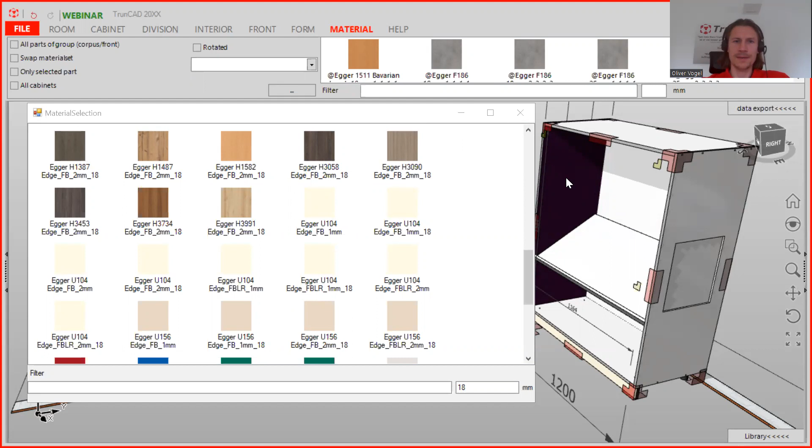So I will close this, and we start a new project. Just click on File and let's start. So the first one was also a desire from many customers, because when you have material sets here, it's not so convenient to scroll to see all the information and also the texture of it.

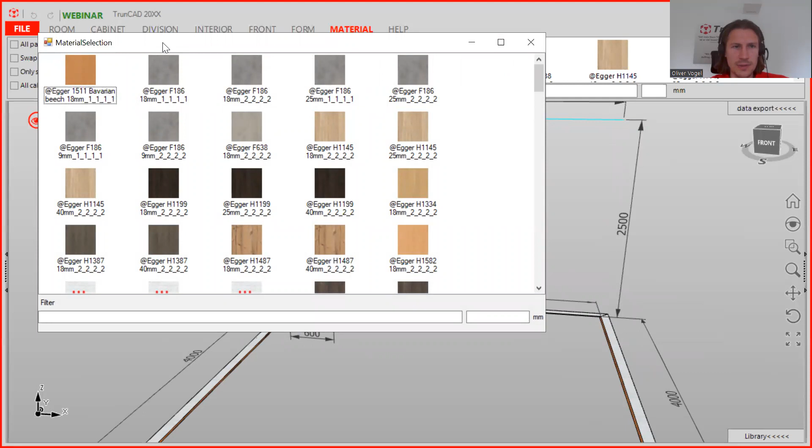That's why when you double click on the material, the separate window opens. You see it here. You can also create your own size, and drag it and drop it wherever you want. You can also use the filter function here. You can type in 18 millimeter, and you get the 18 millimeter material sets.

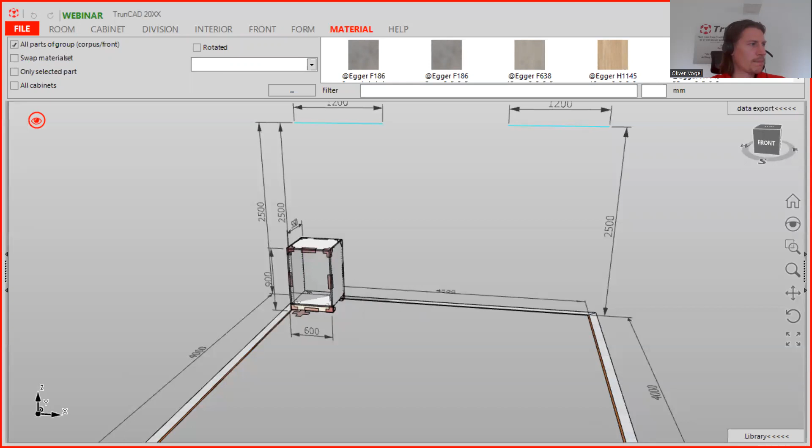And now it's working as usual. You just drag it. You can make a tick on a bar. So, and now you can drag and drop this over it, and it's working. All right. It's automatically glowing in the background. I don't have the task list here, that's why I need to go to the second screen, and you can close this.

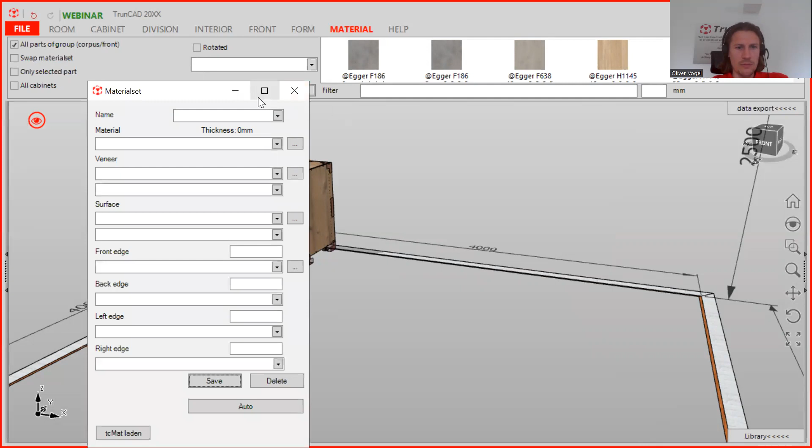And another new function: especially in the English market, we have some customers who are also producing for other carpenters or cabinet makers, like building blocks in London. And they have different material sets than the other carpenter. When you click on this three dot button, you can open the material set, and here is a new button where you can load the tcMAT file.

When you click here, you can choose in Windows C, in the software folder, TrunCAD 20XX. You have the different files here, and here you can choose the tcMAT file. You usually find it in a backup. I'll show you also how to create this. That is easy. You see it here, and there are different files.

Usually when you click on Help and on Hotline zip, you see the backup folder opens automatically. I just close it and open it again. So when you click Help and Hotline zip, the hotline zip file automatically gets created. You also see the current time, that's German time. And when you double click here, you get the material file.

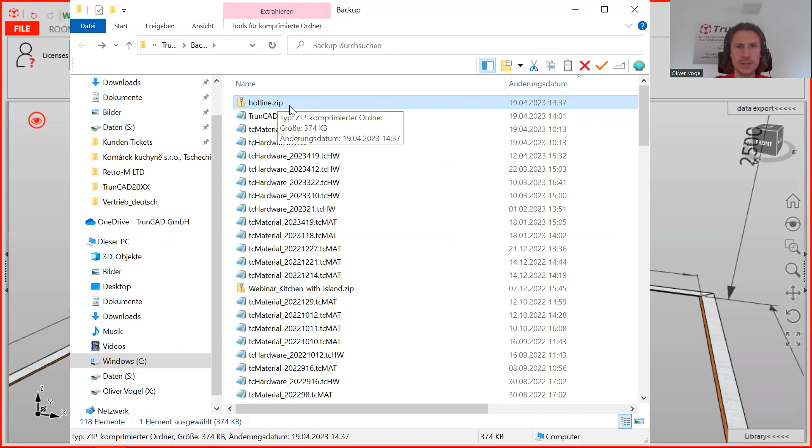And you can extract this and give it to your colleague when you have a separate material file. It makes it much more user-friendly when you have co-workers or when you cooperate with other companies. So with the right mouse click, you can extract the file and send it over. That is a great function as well.

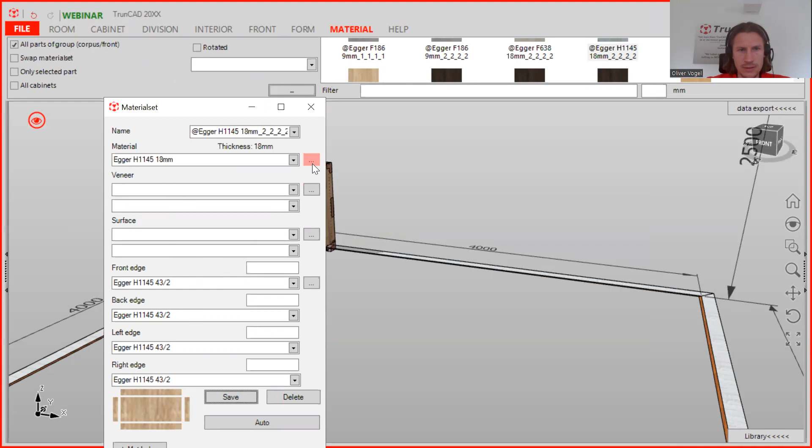And another great function is because of inflation and the fast changes of prices. Usually when you go to the material set, you click a material set, click on the three dot button, and you see the material set consists of the panel as well as the edge bandings. When you click the three dot button again, it opens, and usually it was only possible to change the price per square meter here. But now we have improved it, because a lot of you wanted this new function.

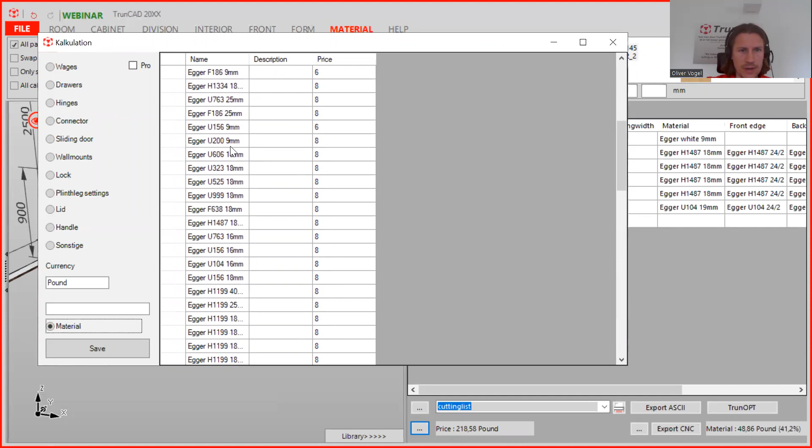When you now go to data export and click on the three dot button on the left-hand side of the price calculation, the calculation opens, and at the bottom you have the material, with all materials available in TrunCAD in your version right now. You can make this bigger, and here you see the prices. So you can adapt these prices much faster. So that is the first part of it.

The second part of it is, I will close it, because you also have the price calculation here. Please consider that in the basic version the price calculation is not included.

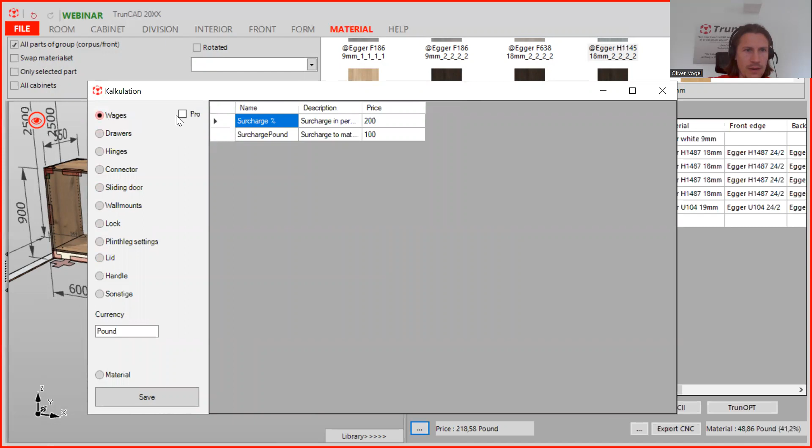And when you have it with a package M or with a TrunPoint version, you also have the price calculation included. And when you click now here on the three dot button, you see here on Wages, you can make a tick on a checkbox. You see here, as usual, the prices for any hole or for the setup for the edge or setting up here the angular cut.

And here when you turn on, you can change here the price. Or you can change here the price in percent. You see here it's now 200. I just type in 100%. From 200 and 100%, save this, and you see here it's already changed.

That is here also linked to the, it's similar like the margin in percent. Here you have also the surcharge in percent. You can change it here, or you can click also on here and add like 200 and save this, and then you have 100 more applying to the whole price.

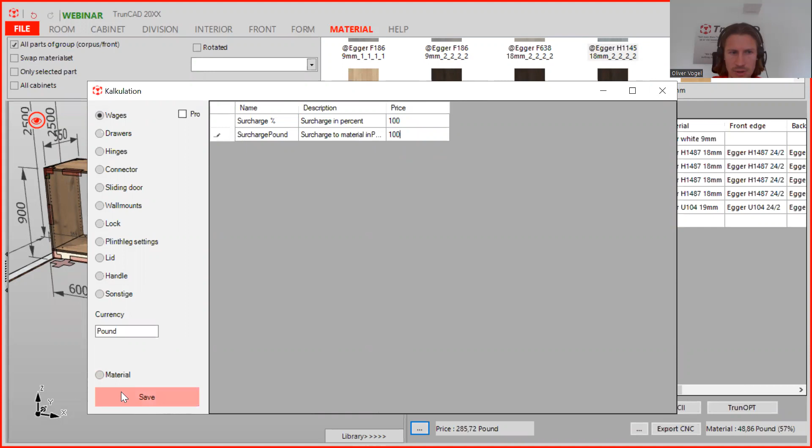You see here it's 285.72 pounds, and when you type in here 100, then it will be 100 less. So you can make it with a whole number or with percent. That is also a great function to make the price adaptation more convenient.

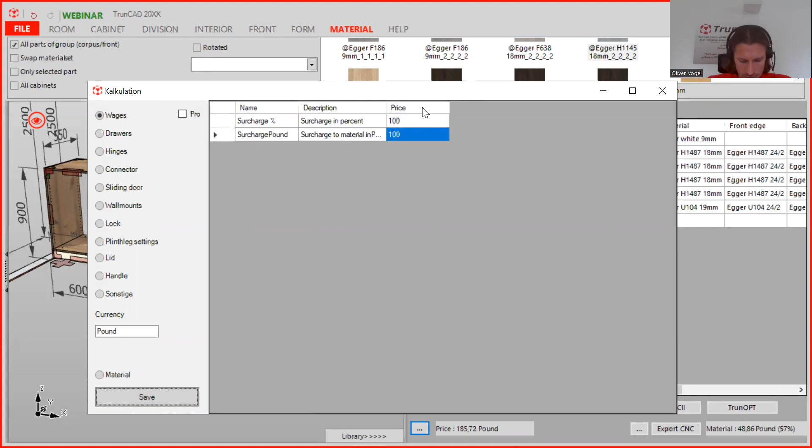All right, so the next one is also to add notes or remarks to your cutting list, because here you see you can create your own cutting lists. So when you click here on the 3-dot button, the window of the bill of material setting is opening. And here, when you click on the drop-down menu, you see the lists, and you can also create

your own lists. And when you scroll down, you see here's a new point, remark. I already have it here, but you can also remove it. Now here you see everything included in your cutting list. And you can also add something more, like point 106 remark. You just click it, that is blue marked, and you click here, and it's applying here on the bottom, and you can

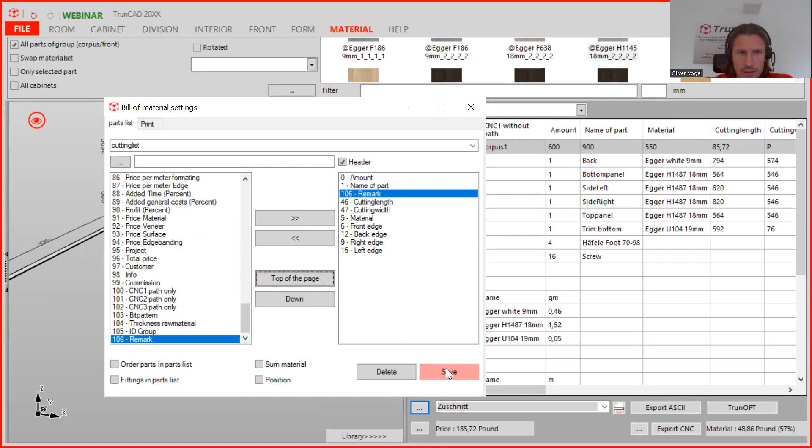move it up. So when you save this and close this, and here we close this window as well, and we go to data export. Then you can apply here the cutting list, and you see here its remark. And now when you have on the right side a specific thing, you just click on here. You see the right side is also marked.

It's a pro function, and you can type in here like note XYZ. And then you can also click here export ASCII and save it as a CSV file and open it in Excel or another similar program. Then you can add notes to your cutting list. So that was also a desire of many of us, and we are always looking for cooperation and improving the software for you.

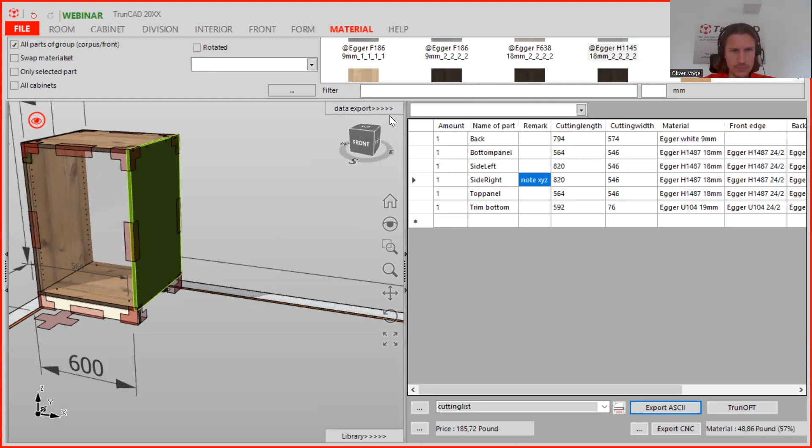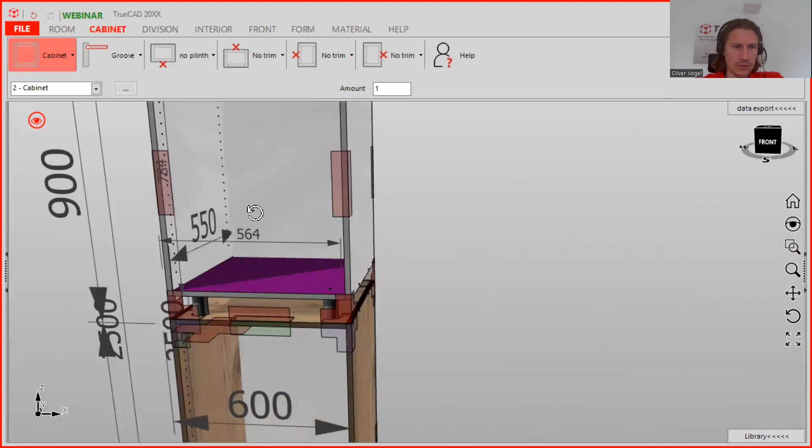So the next one, therefore we close data export. It's about the vertical trims. Let's say, like here we just imagine it's 500 height, and you want to have on top also another cabinet. You can just drag it and drop it here on this. And here you see it's going on top. Now you can click here to no plinths and remove the mark of the checkbox.

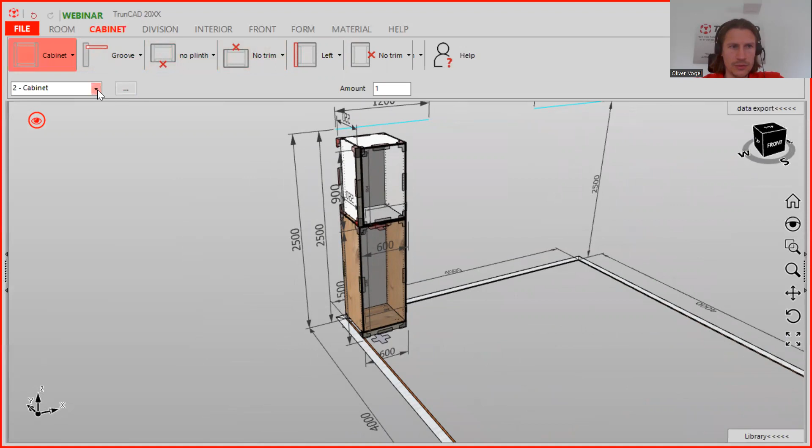Then it's removing. So when you want to have here a trim on the left side, which should go through the whole, and you just want to have one piece, then it's now easier. Now you just click here, you see no trim on the left side. Here you make a tick on it, trim, and here you choose the first cabinet, and here you click also trim. And when this is the same material, it's automatically getting connected. Before it was not so convenient.

Before, I show you here, when you have it like this, trim right side, you are still able to extend it, like here to the bottom. We will extend it 1,500.

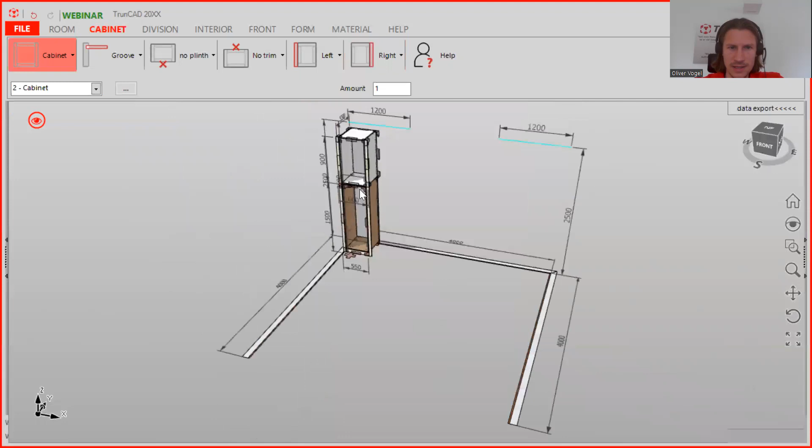Then you see it's here also extended, but now the cabinet is automatically adapting. Before, you needed to also change the width of the other cabinet, and then you had the same product. But now it's even more convenient, because when you go back here to the first one and want to make a quick change, it's now much more convenient.

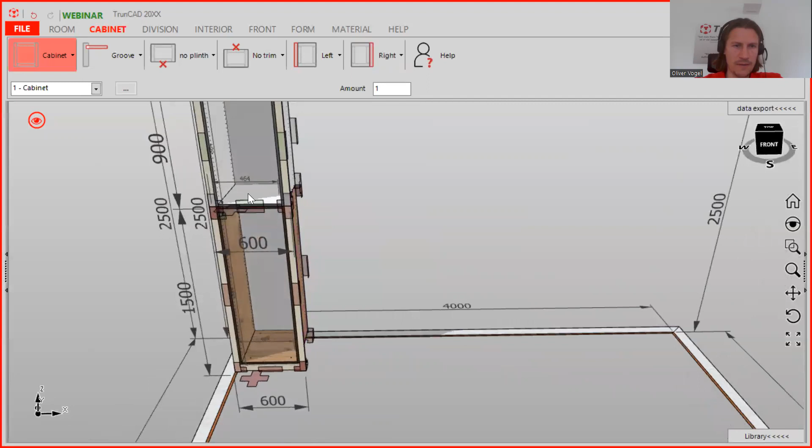So you just click here, right side, type in 0, and here we will move it back to the width of 600. Click here, and they will automatically get connected. In case you want to have them separate, that's also possible. Therefore, you just go here again.

You see you can make an overlap to top, like minus 0.01. That was one zero too much. So, over the top on the right. Then it's 0.1 millimeter, which is still in the tolerance, and the program does disconnect them.

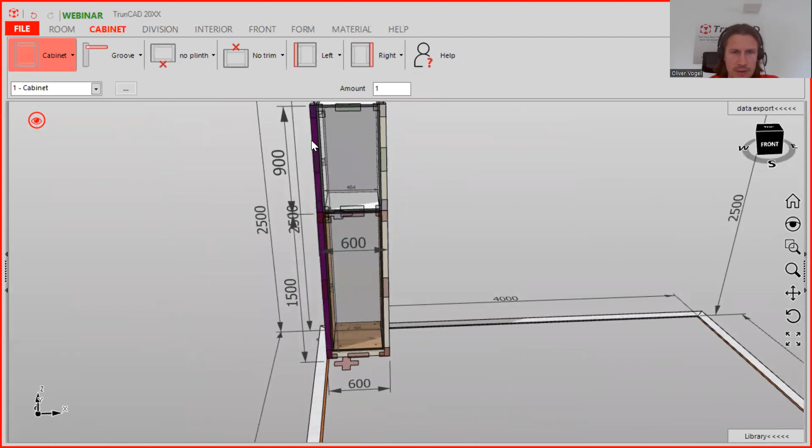You see here, when I go with the mouse over the left one, it's whole marked, purple colored, and here just the upper and the bottom vertical trim. All right, I think that is also well understandable. If not, just let me know in the chat.

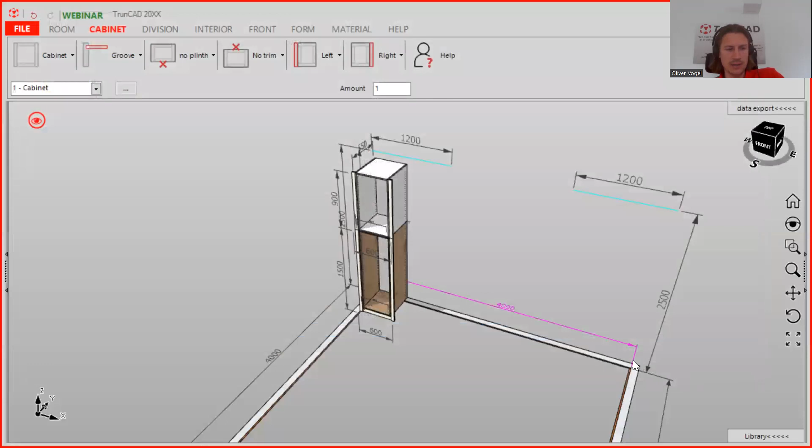The next function is also really nice because it's about new shortcuts. You can press Control S for saving. When you click Control S, you can save your project. Before, you needed to go to File and click on Save Project. Now you can use the shortcut Control S and it's opening.

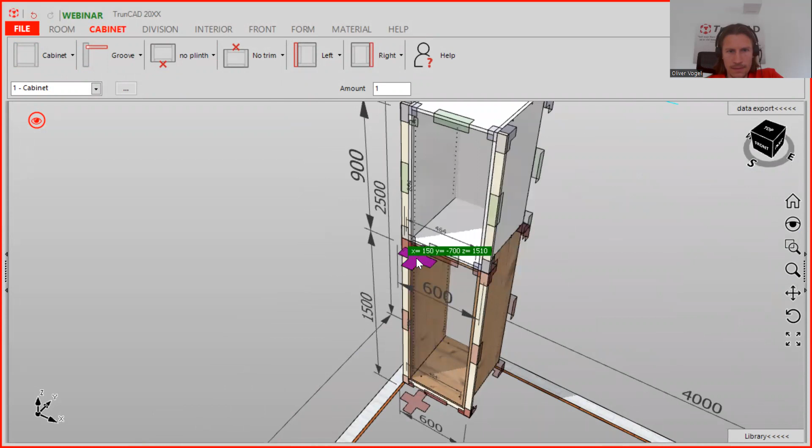And also here you have the buttons Undo and Redo. Here I will just delete the upper one. When you click Control Z, it's undo, and when you click Control R, it's redo. It's the same as here, where you can also undo and redo, and now you can do it with Control Z and Control R. That is also much more convenient than before.

Please note, when you have the trial version, the undo and redo function works 10 times. So it goes back 10 times, it jumps 10 times forward or back. You need to consider it. This is because of performance issues. All right.

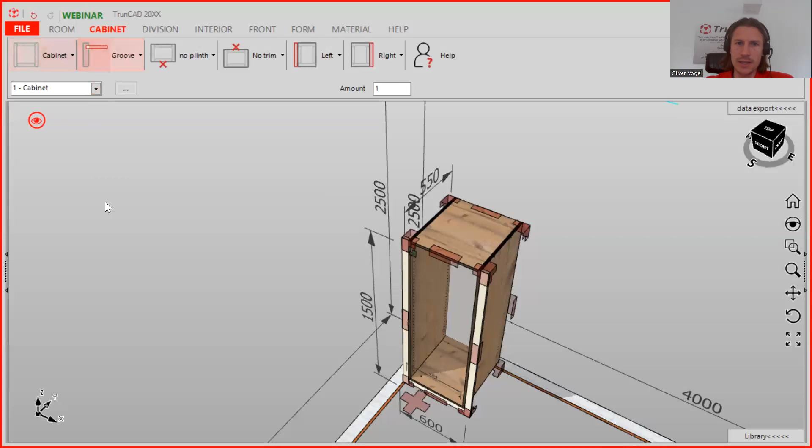The next one is also a really good improvement, especially for the small carpenters who don't have a connection to a CNC machine. That is about when you have a ceiling apex with a sloping roof. We type in here 2000, the height of the cabinet, and the width is 1000. In this case, I will remove this.

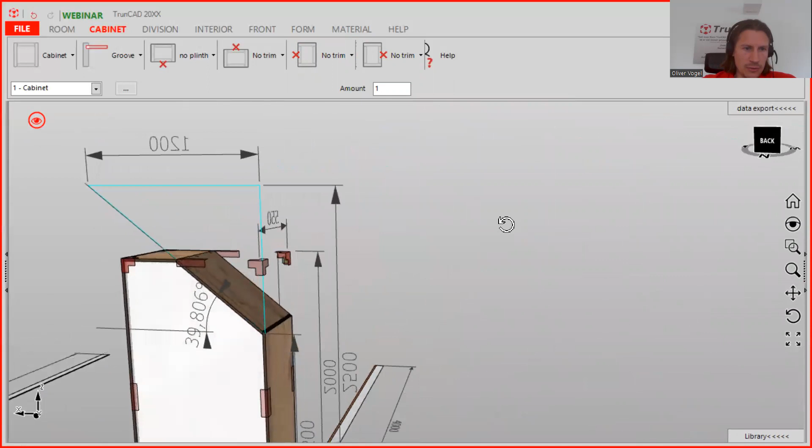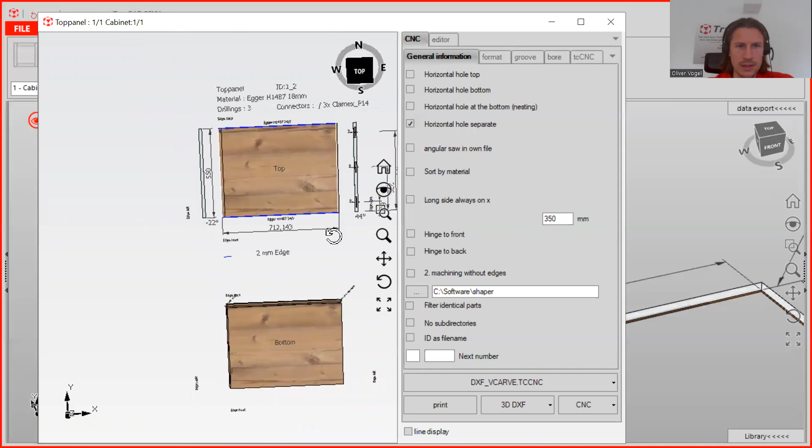You see now you can also set up the angle. I just type in 44 degrees, and here it is adapting. The new function is that when you double click this part, you have more information available. You see here the angle, which wasn't there before. It's 44 degrees, and here it's minus 22 degrees. So that is applying. I will close this.

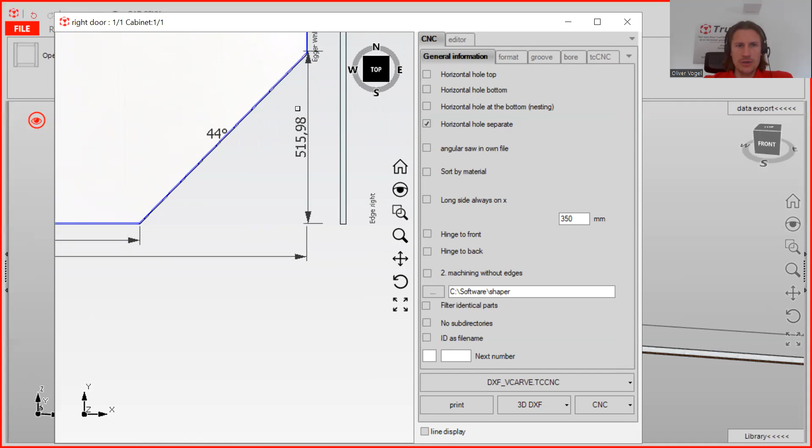When you have a door, we just drag and drop a right door on it. You didn't have these measurements before, but now when you double click the door, you see the 44-degree angle, the measurements of the lower part, and for the sloping roof, the distance on the top. That is more convenient for carpenters who don't have a CNC machine, and you get the information in a more convenient way.

All right, I am closing this window now, and we have a look at the next improvement. It has to do with the handle. When you click here, you can choose no handle, then it disappears. And here you can also have a pocket as a handle.

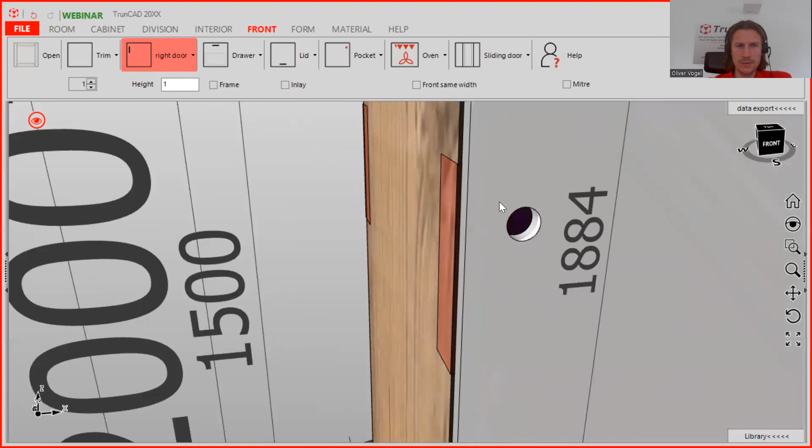Here you see the drilling is going through, and the improvement now is that you can choose the depth. One means it's going through; when you type in 10, you see you have a distance of 10. So the pocket has a depth of 10. That is a new improvement. It wasn't there before.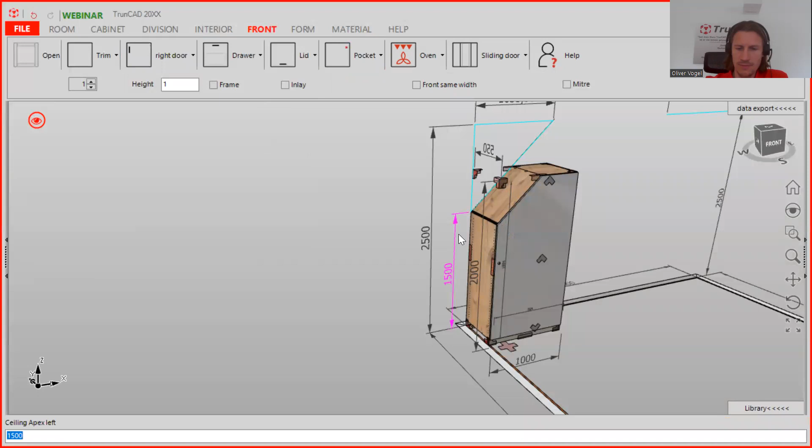So the next one is also really convenient. Therefore I will remove the ceiling apex. Yeah, and we remove the door, and we add here a double door. So now we can also change here to the wireframe. Yeah, and you see now here the hinges.

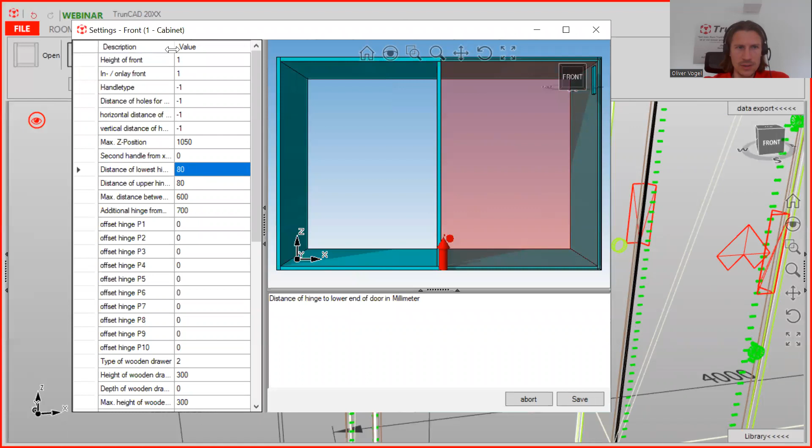So when you click here on the smart click for the front and you go here in the setting, you were able to change the distance of the lowest and the upper hinge here, and also the maximum distance in between. So the distance between these doesn't get bigger than 600. And also when you have shelves, you can set up here any hinge. When you type in a positive value, it's going up, and a negative, it's going down. You had to do it manually before.

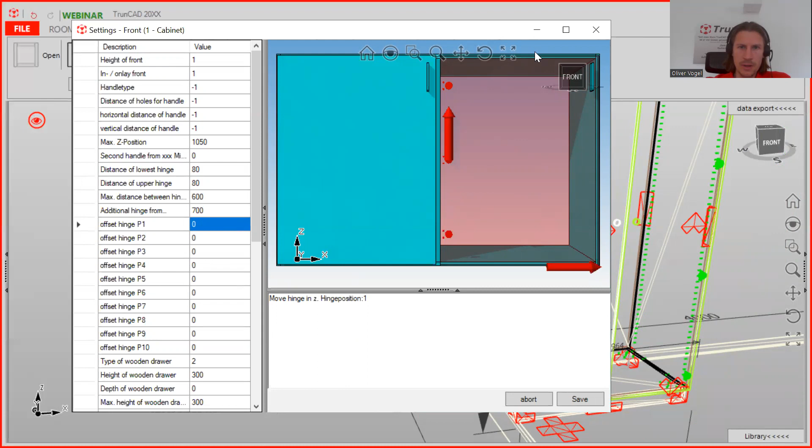But now I show you. Therefore we go to another view, and we draw the fronts open. And now we just add here 2 horizontals. So, we close the doors and we go to the last view. Now you see you need to make an offset individually. You can choose, shall it be upper or lower? That is still possible.

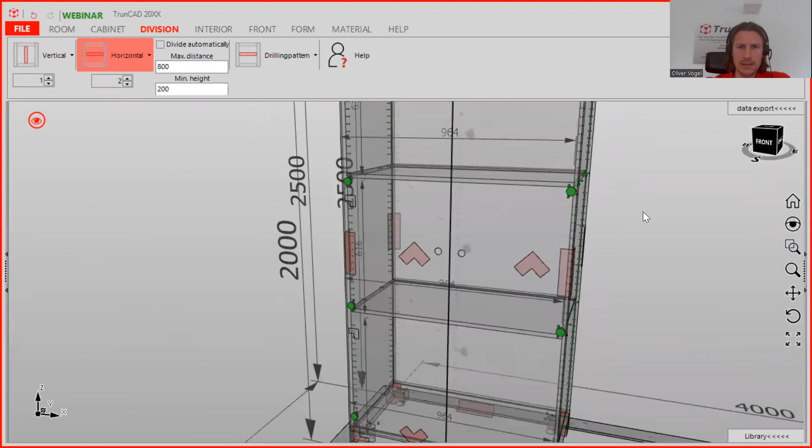But now when you click here on the front tab and here on a drop down menu for the doors, you can have here an automatic value for the offset of the hinge. And here also a positive value is going up and a negative value is going down. And when you type in like here 40, then you see everywhere it's going up 40 millimeters. When you type in here minus, you see it's changing straight away to minus 40. That is also a really convenient function.

All right, so that was the 10th new function. Now we go to the 11th one, and this has something to do with the plinth panel. So therefore, we change here the view. We draw the fronts closed, and here we go to this one. So when you go here to the cabinet tab, you see here is no plinth. And you can here remove also the plinth legs, then it's removing.

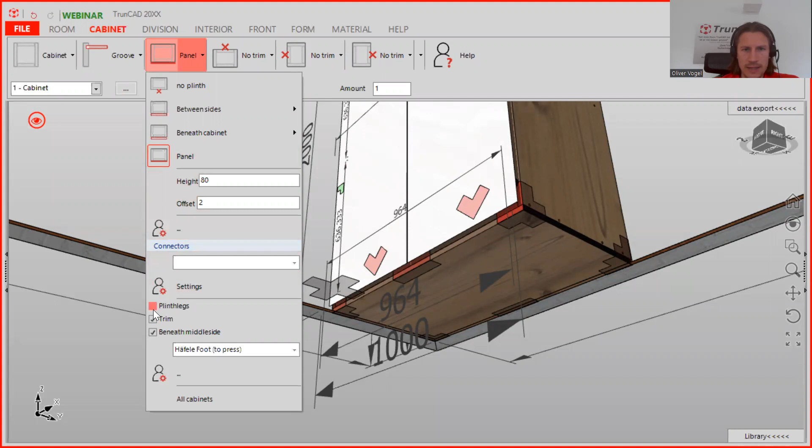So before you couldn't have here the bottom panel for the plinth together with the plinth legs, but now it's available. What is also available is, when you have here activated the trim, you can here activate or deactivate the trim for the back, left, and right. That is a new function.

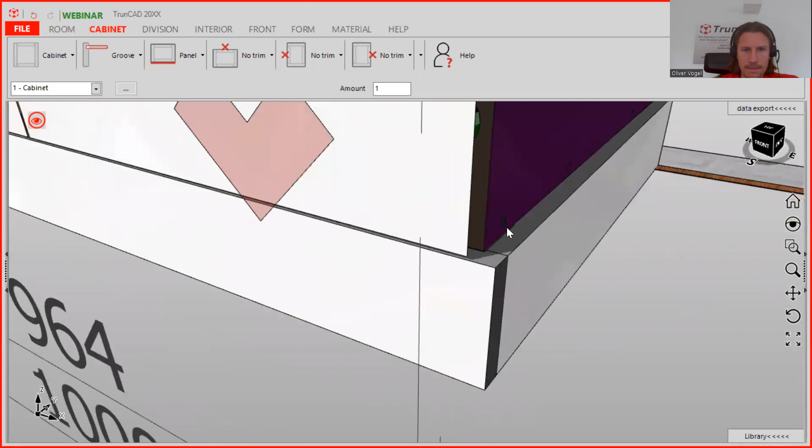And you can also set up, I've made it in preparation. In the default, it wasn't like this. When we have here left and right. Ah, yeah, now it's here. You see here the overlap. And when you click here in the setting for the plinth, you can here type in distance left 18 mil. This is the thickness of the material for left and right. And when you have here distance left, from the edge to the middle, and save it, then you have it here.

And you can choose. Before it wasn't possible to have here the plinth panel. Now you can have it also with everything else. So that was the 11th function. And now there's also a really specific function. I think it's not so important in general, but I still want to show you this.

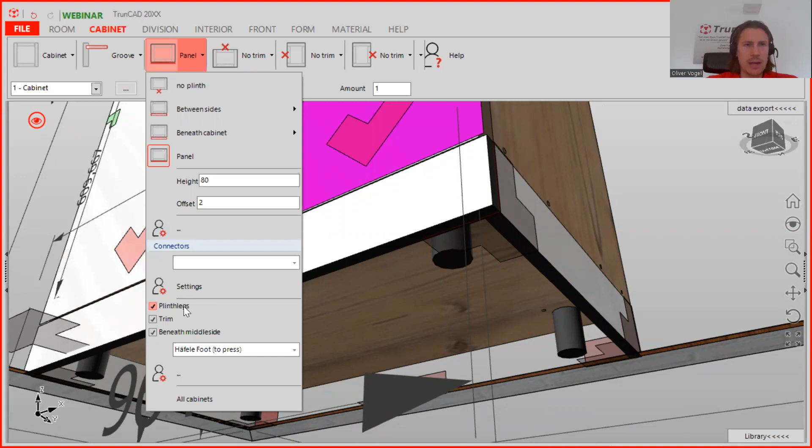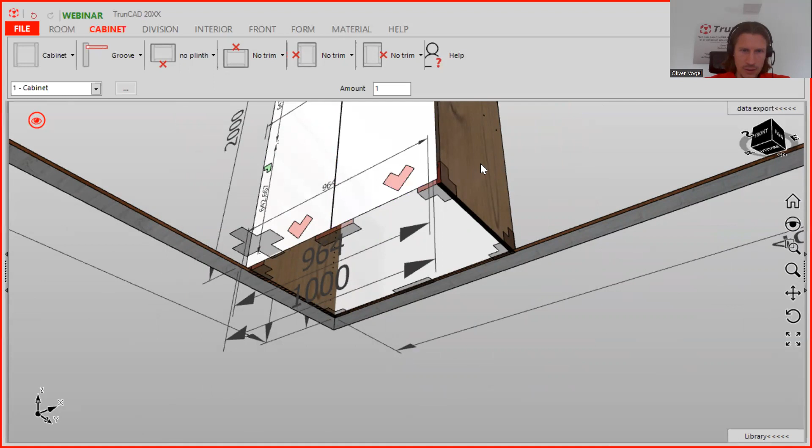In a case we don't have here a plinth, and we don't have the plinth legs, and we don't have the bottom panel. That's why I delete here the bottom panel, and now you can still have like a plinth with the double door with trims on the bottom end. So, therefore you click here on the smart click, and you type in here overlap at bottom minus 80 and confirm this with enter.

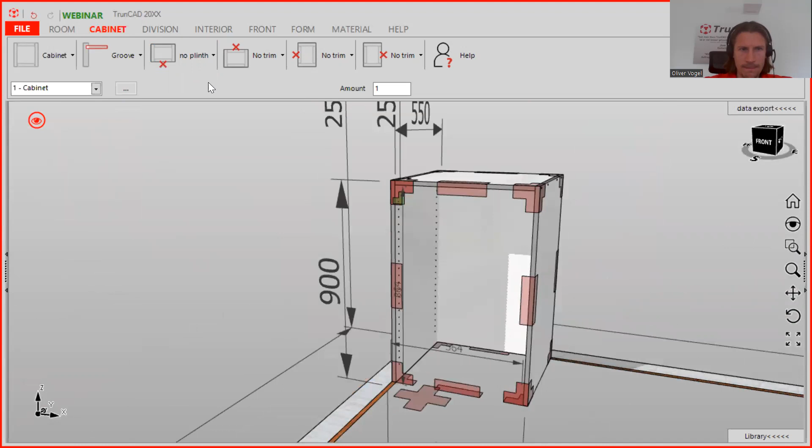And you click on here, maybe I start here a new project, and we remove this. And we remove the trim and plinth legs. And now we have here a double door.

Now I know, because I was drawing the doors visible. That's why I didn't show this.

When you click here and type in overlap at bottom minus 80, then here's automatically coming a trim at the bottom end. So you see, you can also extend this trim.

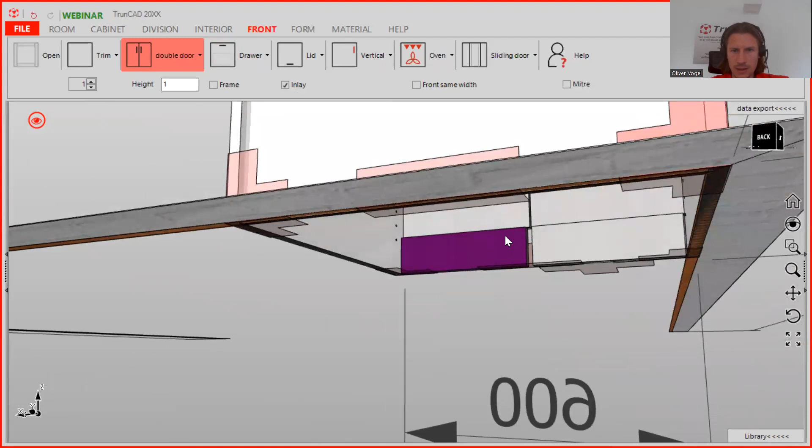Therefore, you go to the cabinet tab and click on the drop-down menu for the plinths. When you type in the height like 140, you can make it bigger. And you can also set drillings for this connection. You would just double click it.

Now we can go in the editor, and here you can choose like a bore, and here you can make the position. You see here X and Y.

Y would be here 110 mil, counting from the bottom, then you have here 30 mil left to the top. And here also the position X, you can type in 30 and diameter like 5 mil, and the depth, when it shouldn't go through, you can type in like 10.

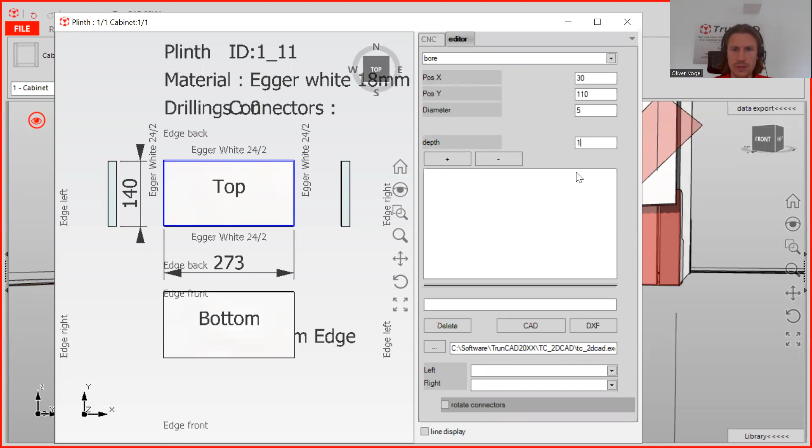When it shall go through, then you can type in 1, and then you click on plus and you see it's appearing. And on the other side, you type in position X is 233, and you click on plus, then you have it on the other side.

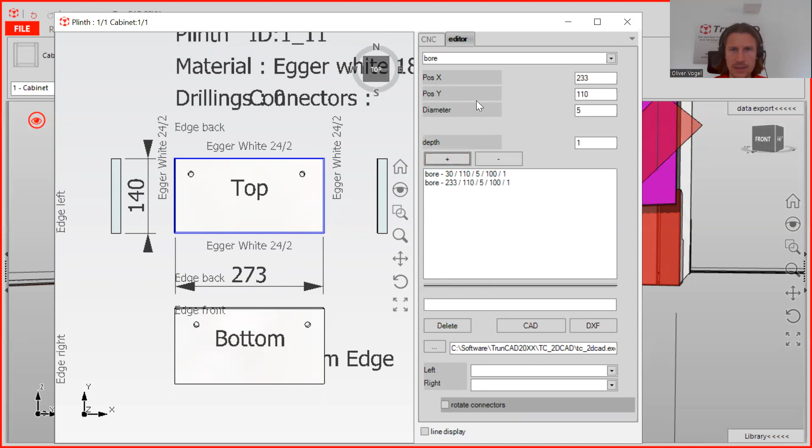Now you can close this, and we can change to the glass view, and you see here also the bore drillings. It's applying to both plinths on the end of the door.

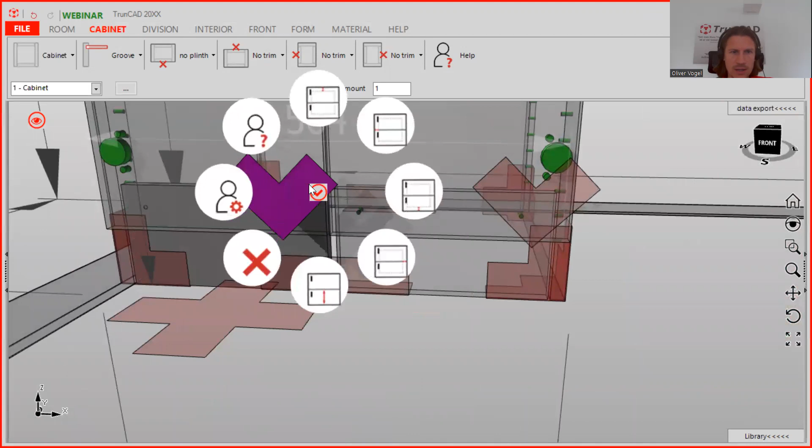That is it, it's really specific. When you have these cases, you can make use of it, and you can change the space, you have more tolerance. You can change it when you click on a front, right click, and here on a setting.

So you scroll down, and here you can also change the space. Here you see the gap of front between front parts, and here you also have the dragging plinths. That is called dragging plinths because it's connected to the door and it gets dragged with the door.

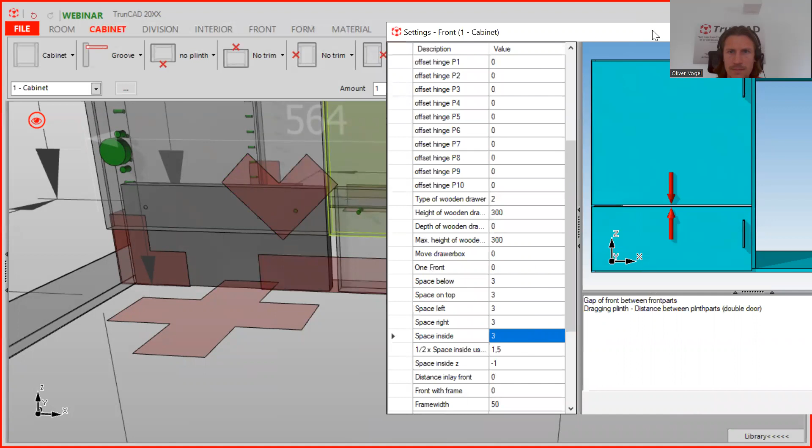And you can make here the distance between the plinth parts for double doors. You can set this value for this space here. All right, that is it.

Now we have a really great function which makes it really convenient when you use interior drawers. For the interior drawers, the last weeks I showed you, I already made 3 webinars. I show you here, I just drag and drop it in here.

When you go to starter webinars, you have 3 parts: creating drawer fittings, configure wooden drawers, and front drawers and interior drawers. In the first of the 3, I explained what to consider when you use interior drawers.

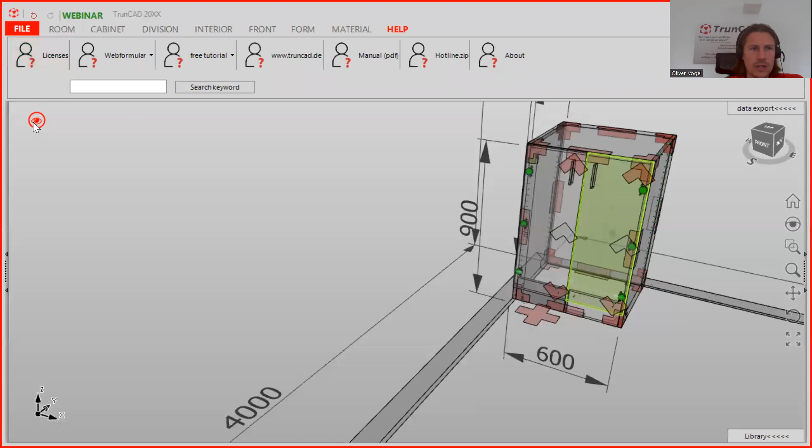This is still working, but now we improved the use of interior drawers, and it's much more convenient. I will minimize it and show you what changed. Therefore we go back to rendered view here, and we delete the doors.

Or we actually just create a new project. So we click on interior and just add 2 adjustable shelves. Here we click, we make this area a bit bigger.

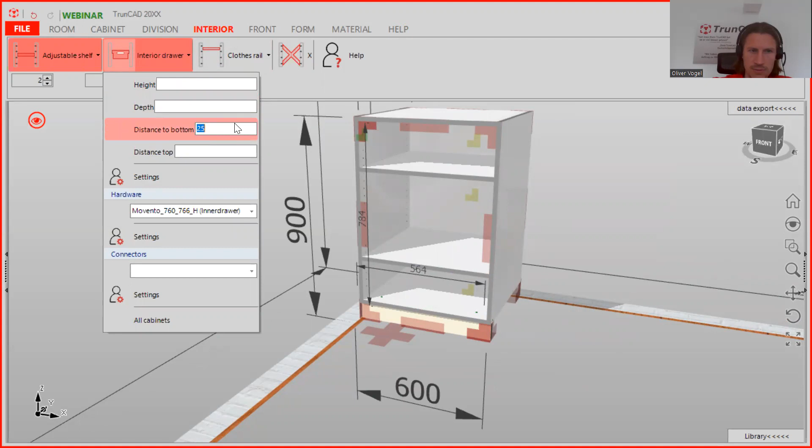Before, you see, this is also my default, we needed to set the height for sure. But now you can keep it empty, as well as the distance to the bottom. We keep it empty, and you can now drag and drop 2 interior drawers in here.

And the improvement is that we now have smart links for the interior drawers. We haven't had this before, so we couldn't change it. But now you can click here and change the measurement. It's like the front drawers, it wasn't possible before.

You needed, when you wanted to make a change, you needed to delete everything and set it in a new way. And now you can change it and it's adapting.

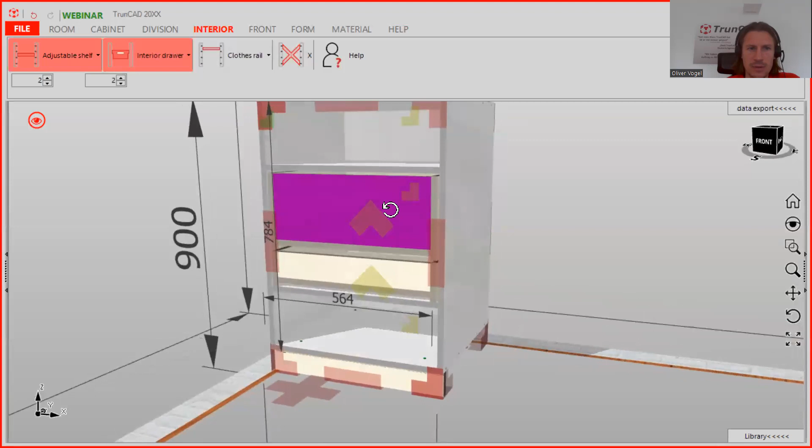You can also click here and change also the overlap to top, like here on minus 550. Then you have here also the overlap. That is much more convenient.

But the other way is still working, so no worries when you are fine with old usage. Okay, that is also fine.

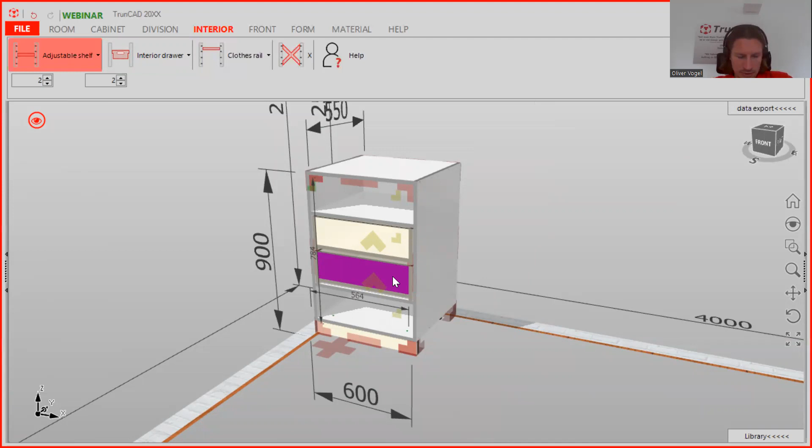The next function also has to do something with interior drawers, because now, you know, when you click on front and add a double door, and I don't want to have inlay doors.

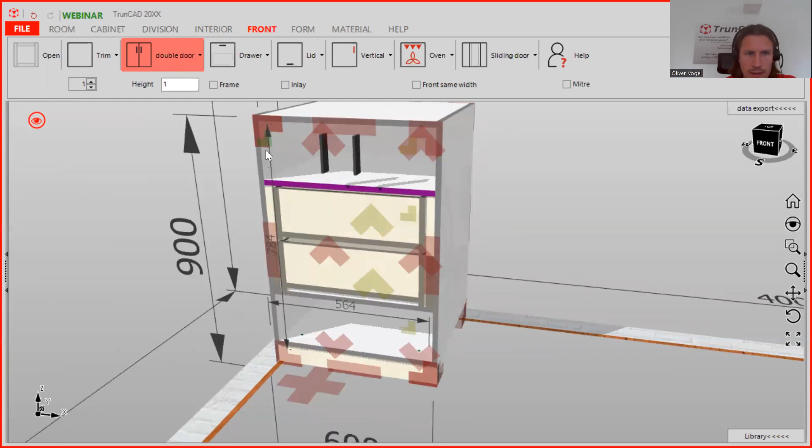But now, when you click on here and you go into a setting, then you have new options. So I just need to make sure that I'm right.

Because it's also new for me, so just give me a second that I can show you correctly.

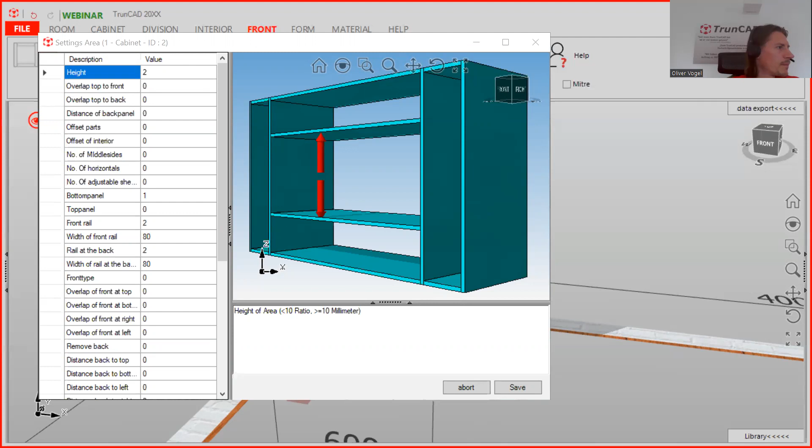I just used the wrong smart link. So the right smart link is here, the smart link for the interior drawers. You click here on the yellow one, and then you go here into the setting. And here that is now new.

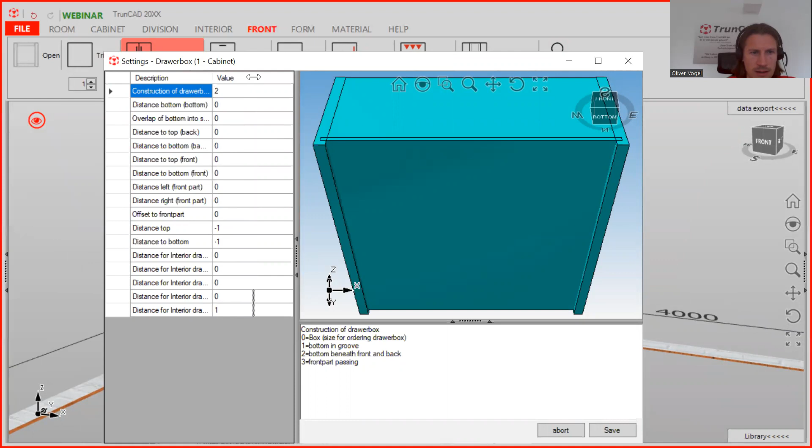You can change here the distance for interior drawer offset front. You see, I will close it, you see it's going here to front. And when you click here again and go into the setting, you can make this bigger. So here you see it's also visible.

You can here change the distance to the top, bottom, back and front. When you want to have like 30 mil from the front, you type in 30 mil and save it. And now you see here you have an offset of 30 mil.

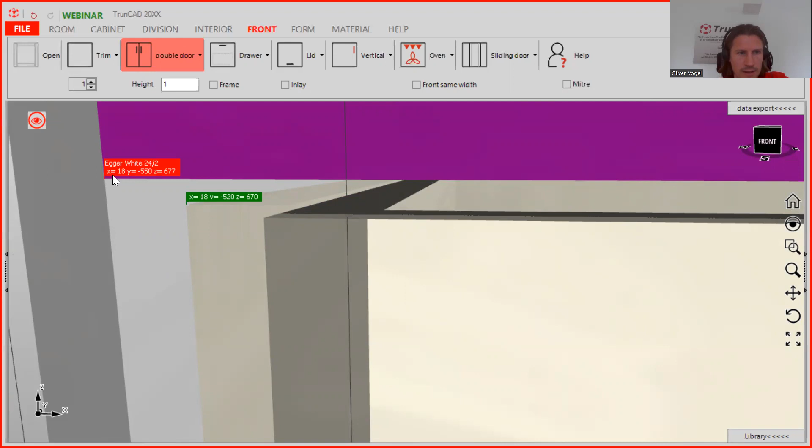And you can also measure it: you keep the control button pressed, go here in the corner, click it, still keep the control button pressed, and go here in the corner of the shelf. And you see here dy is the distance from the front to the distance panel, 30 mil.

And you can also change the distance here to the top, to the bottom, and to the back. Just click here the smart link for interior drawers and go into the setting. It's here also - you see the description written, as well as here on the right side visible.

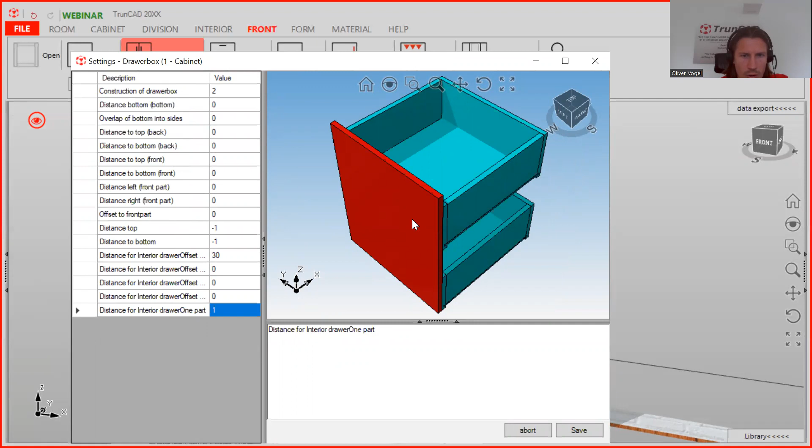Here you can also choose, do you want to have one part or two separate parts? And here you can also change other things - just check it out. You see it here in the description. All right, that is also a good, more convenient, user-friendly function.

And now we have also a really specific one: you can have angled shelves for like a shoe board. And therefore we start a new project. So we change here the depth of it and the height.

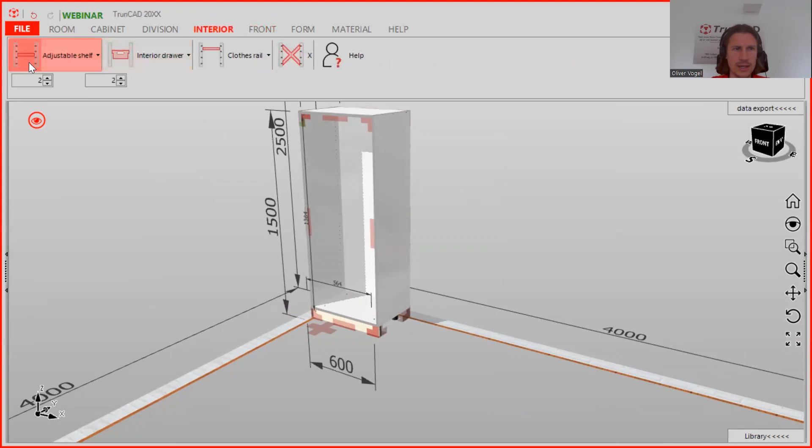So now we just add here two shelves. And when you want to change this shelf, then you go down to the area here, click on here, and now you go into the setting of this area.

So here we have the new function. When you go down, you see here top panel. And here on the right bottom side, you see we have new functions available. You can type in here number 6 - it means adjustable shelves or horizontal is straight, we come later to it.

And here, when you type in number 6, you can choose an angle. So you type in here 6 and you scroll down here, and here you can type in the angle of the horizontal, like 30 degrees. And here you can also choose the width of the stopper bar, like 40 mil.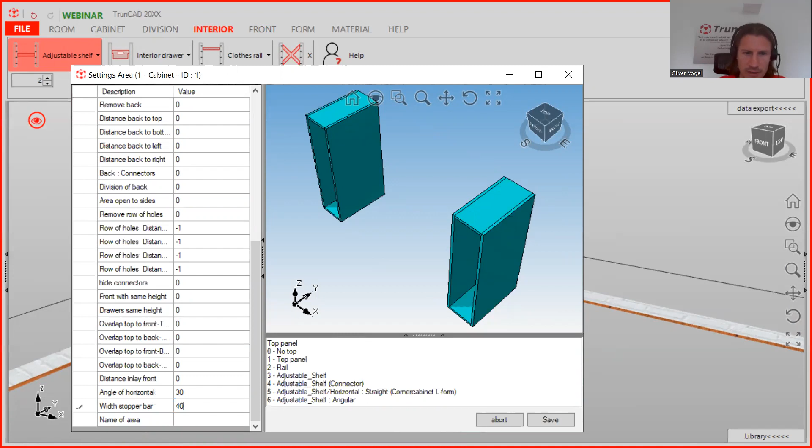And now you can save it. And you see here the area is still here, and you have here like a 30-degree angle, and here you have the stopper bar.

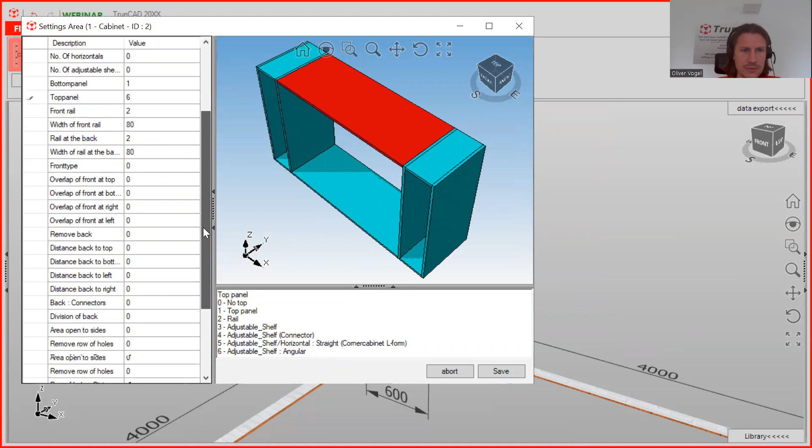When you want to have it for this, you can also click on here, go here to the setting. You type in here top panel number 6, that activates the angle, and then you scroll down. And here's the angle of the horizontal, you type in 30, and here's the width of the stopper bar, like 40, and now you can save it.

And that is a really great function because it wasn't possible before, and it was really important for some of you. Yeah, that is really nice. And...

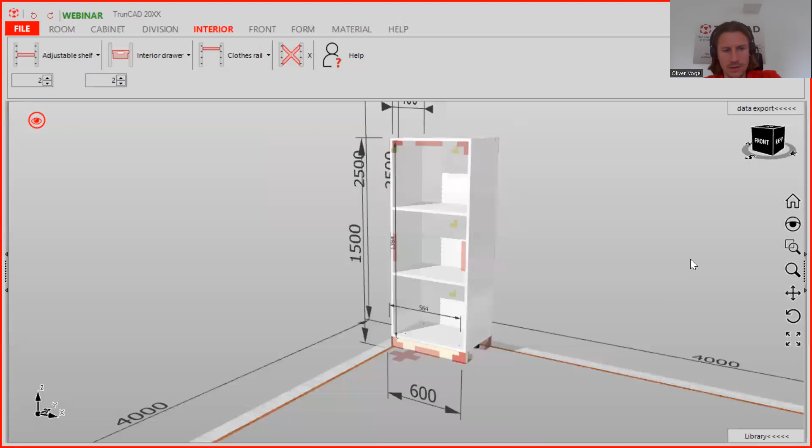I just check here, I click Control R to remove this - so I need to click Control Z to remove this, and Control R to... yeah, this is working. So you can also click here, and you can copy this, and you can click in here and paste it.

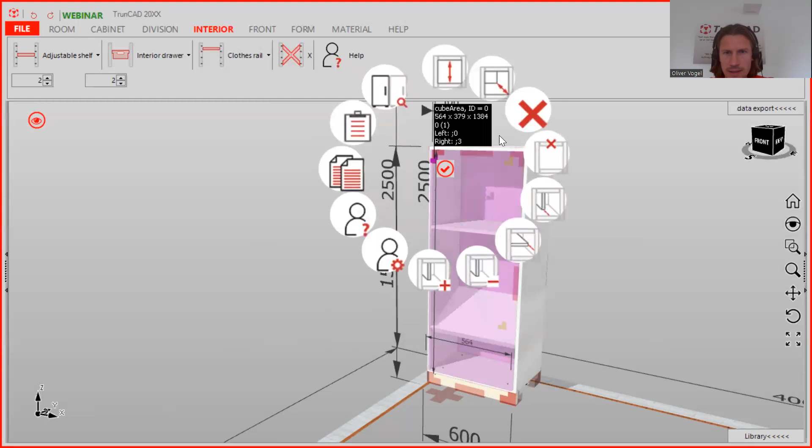Undo this. Okay, now it was additional, so don't mind this. Yeah, you can still make it individually. So, okay, so the next one. Therefore, we also delete this, and now we start a new project.

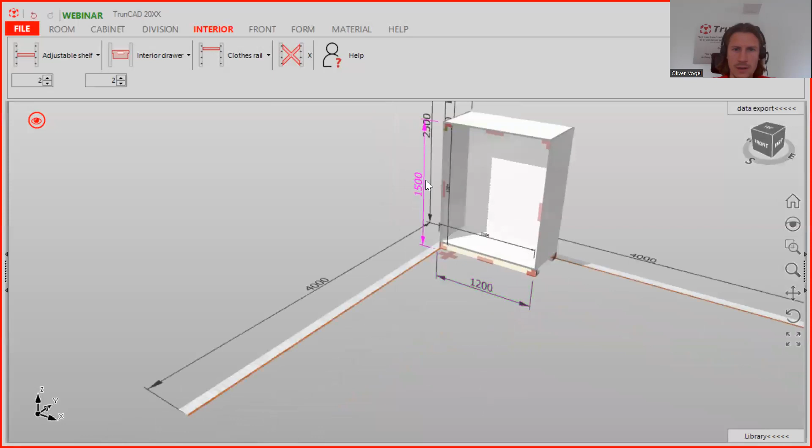So the next one is about corner cabinets. We change here the width of it, like 1200, and here's the height, like 1500. And when you click here on the smart click, you can have an L shape.

And when you add here now a shelf, yeah, it's usually going around the corner. So now you can also choose, do you want to have it like this, or do you want to just have it straight? Because up to now it was impossible to change it.

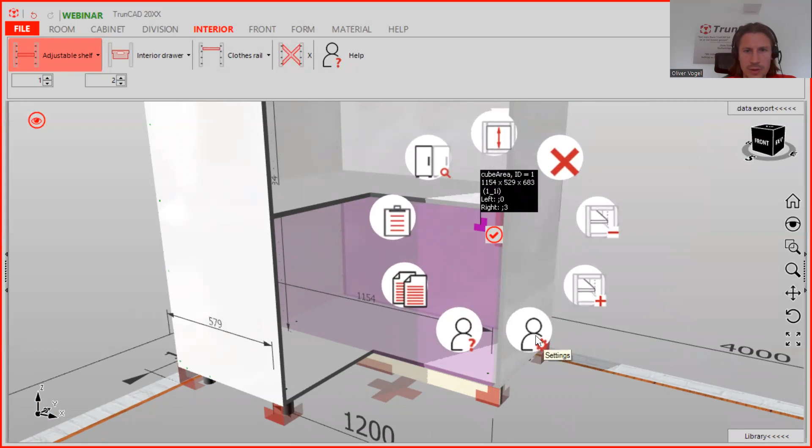So when you click here on this smart click for this area, click on here and you go into the settings. And you go here also to the top panel again. And when you type in here number 5, it means the horizontal or the shelf is going straight when there is an L-form cabinet. Type in number 5, save it, and you see it's changing here.

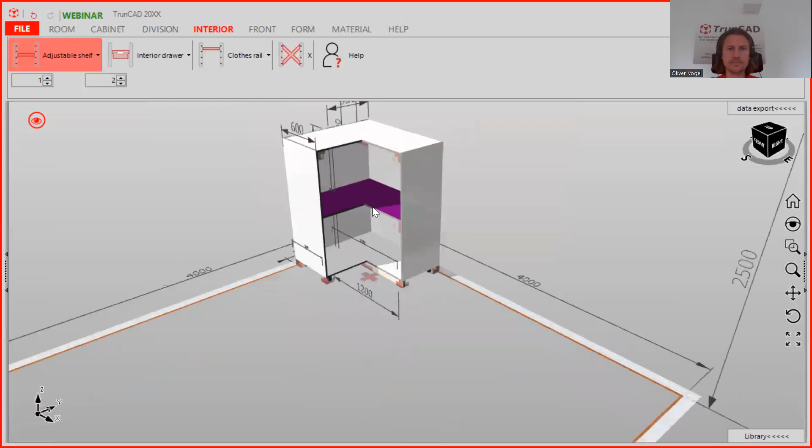When you still want to have it as usual, then you have here number 1, and it's going through the corner. All right, and that was this function.

And now we are coming to the last function, and this is also really great when you want to make pockets. Because up to now, when you wanted to have a pocket, you would double click the part where you want to have a pocket.

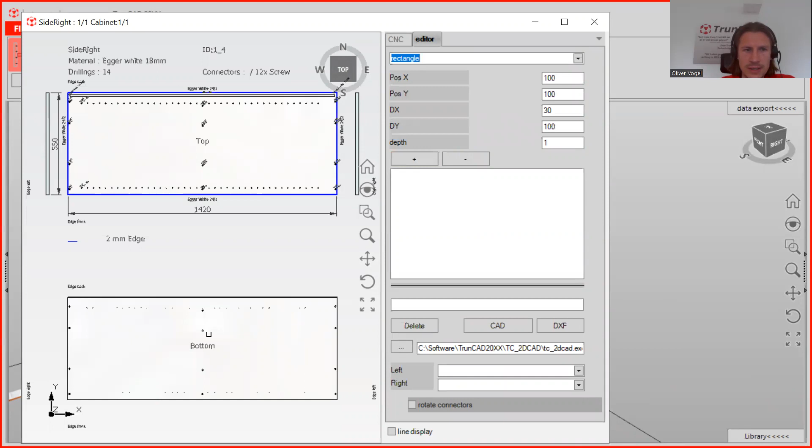And you went to the editor, and here you can choose like a rectangle, a groove, or a bore. You could choose here like a rectangle, and you needed to set the measurements of the pocket in here, and you needed to calculate it so that everything is all right. You needed to have the starting point X and Y, the size of it, dx, dy, and also the depth.

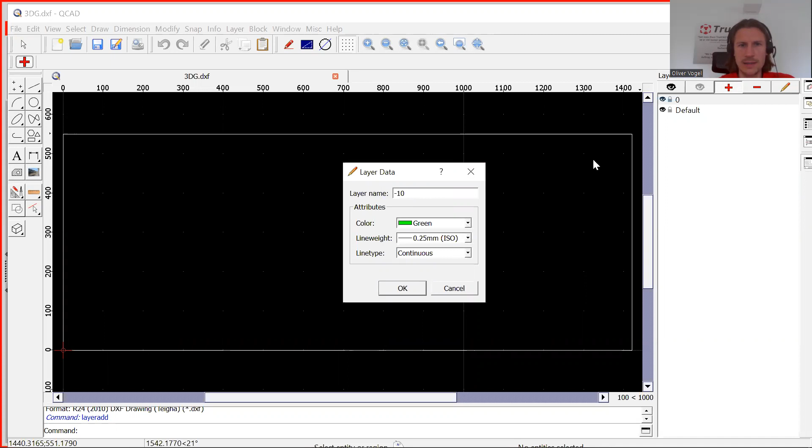But now you can go here to the QCAD, to the 2D CAD, and you can create a new layer. You click here on plus, and you can choose here a green layer, and you can call it -10. Then you will get a pocket on the outside. You just click here OK.

And now it's much easier, yeah, when you have your measurements from the corner, then you can use here the parallels. You can choose here the distance, like 250, and you don't need to calculate anymore. You just make it here.

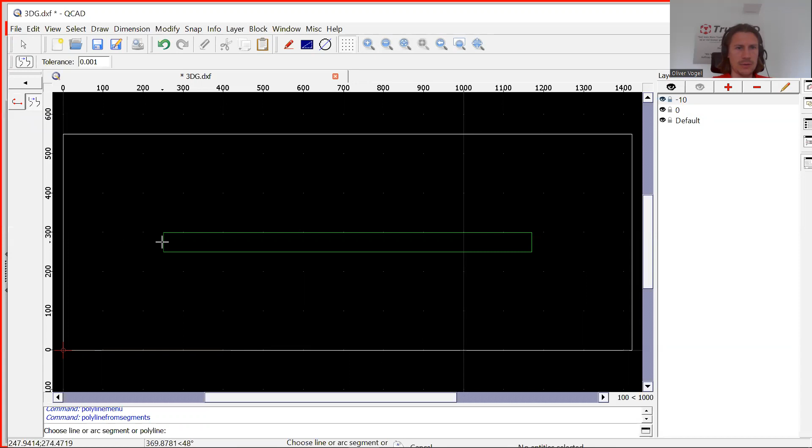Then you go back. You go here to the modification tool, and here to break out the segments. I break out the segments, and it wasn't possible before. You go back here and you go here to the polyline tool, and you create a segment, then a polyline from the segment.

You save it, and now you close this, and now you click here, import DXF, and you close this, and now it's much easier to have a pocket now. You don't need to calculate too much. You can create your own layer for this.

Okay, I hope you really enjoyed it.